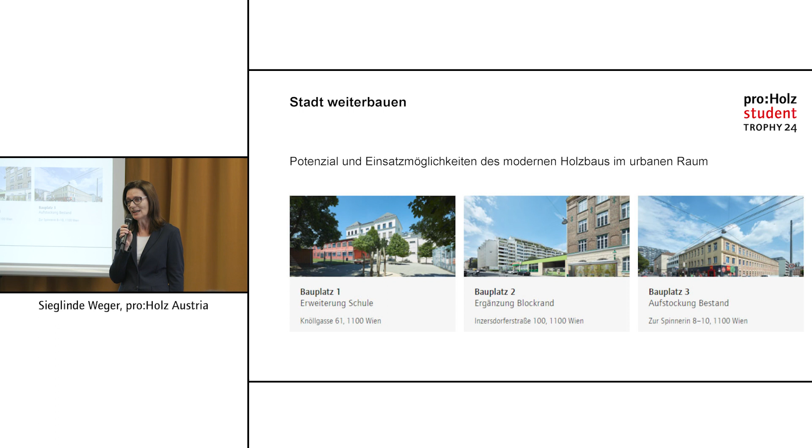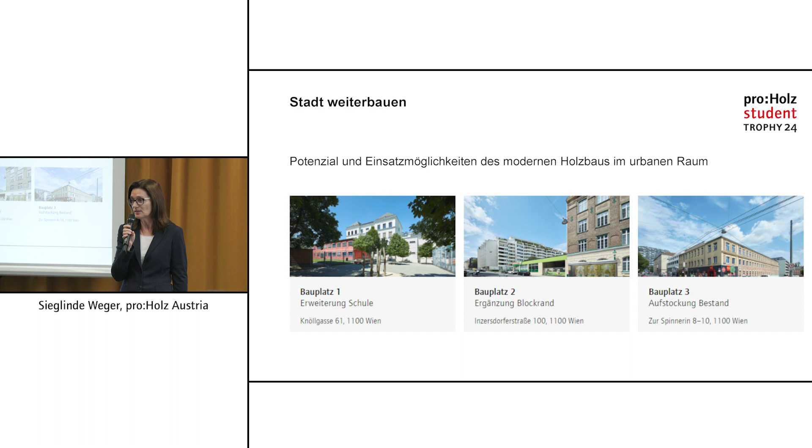As you probably already know, the construction tasks are all described in detail on our website, so you can already start working on them. I assume most of you have already started your design project as well.

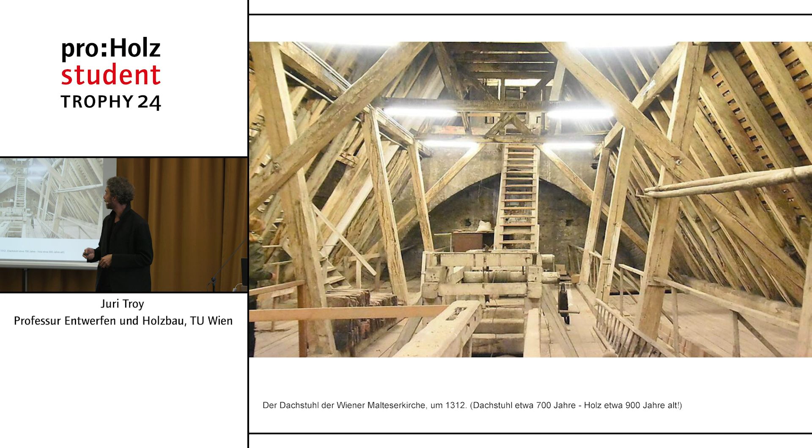I was lucky to grow up in a Rhine Valley house in Vorarlberg, which is now exactly 240 years old and still functions perfectly. Yes, you just have to design and build it accordingly, and then wood is actually capable of maintaining its function over a long period of time—except in cases where this is then prevented for whatever reason. And then it suddenly becomes very apparent that wood was used everywhere.

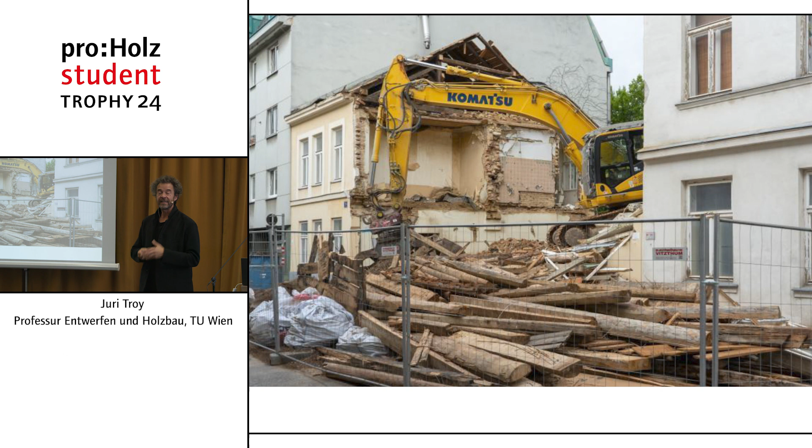We have to stop this madness. It really can't go on like this.

It can only be compared with the destruction that happened in Vienna during the two world wars. That was, if you look at it historically, an insane break, not only in our history, but, importantly, in our building culture, in the way we build and how we had been building up to that point, and in this strand as an evolutionary development of building culture that has been passed on from generation to generation.

On the one hand, this change and the necessity of rapid reconstruction have led to the emergence of completely new construction methods. But on the other hand, a great deal of building culture and knowledge has been lost. If you walk through the city now, you see a lot of these places where you realize that this has not been a continuous path of evolutionary development, but that there was a very strong break somewhere in between.

I strongly believe that every construction method also generates a certain inner logic and certain ethics for handling the material. And I also believe, and this is the wonderful aspect of working with wood as a material, that it demands such a clarity of structure, thereby also a clarity of thought and design, and forces you to think things from the ground up and develop this clarity out of the material.

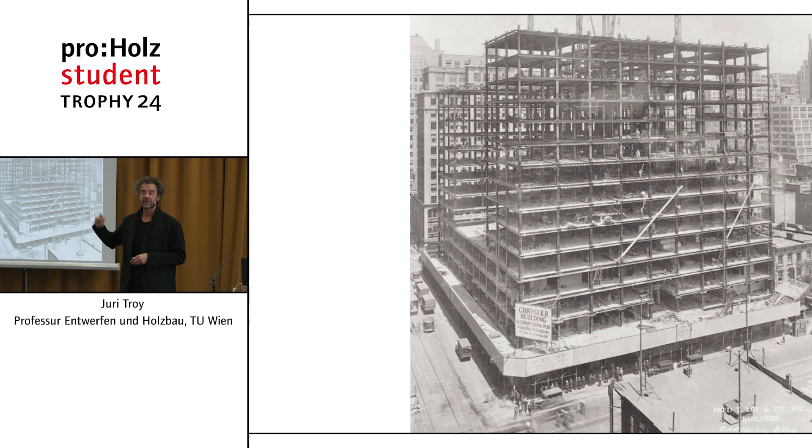I don't think it was supposed to be New York either, but what we see here is again a reflection of history, namely that due to these pressures, the strong influx and the strong population expansion and associated new technologies, the cities have also completely changed in a way that would not have been considered at all possible before. This pressure enabled a completely different way of building, a completely different architectural language, and a completely different development.

These changes were, on the one hand, the technologies and the materials, and on the other hand, quite small and seemingly unrelated inventions such as the lift, which led to the possibility that one could suddenly build upwards, leading to the creation of these new architectural structures.

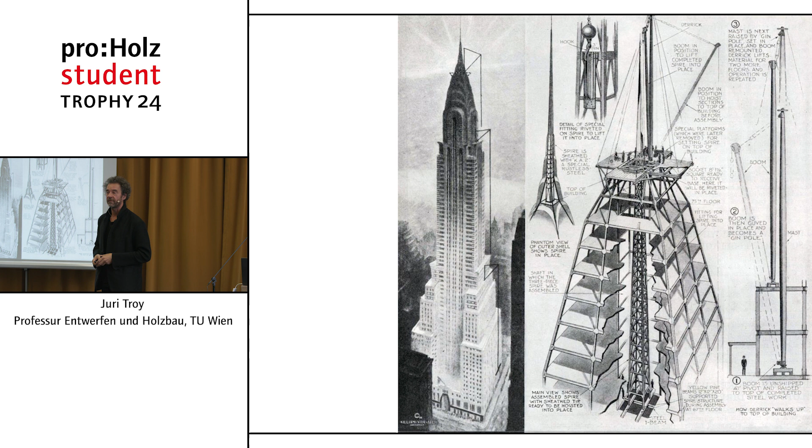Why I'm showing you this is because I really admire how people dealt with the challenges during that time. There are incredible drawings from the time and stories that explain how structures like the Chrysler Building were built. Right to the end, there was this fight for who would build what was then the world's highest building, and how they could prefabricate the top and push it out of the building from the inside at the end. Absolutely crazy. But there was no effort spared, and the technical possibilities were there, so that everything was just feasible. That was absolutely fascinating.

At the same time, however, there were evidently enough foolhardy people at the time who were also capable of completing it. You might think to yourself when you see it today, wow, that does not quite meet health and safety guidelines, etc. But it seemed possible at the time, and it looks like there was a certain pride in the eyes of the people who built these buildings back then.

Maybe we are not so far away from the situation we had back then. There are still reckless people today who do quite strange things. Perhaps the question is rather, how can we channel this energy and this recklessness in such a way that it can be used for more important things than a selfie at the top of a broadcast tower? That might be a question that I would put to you all.

Let's come back to the development of Vienna briefly. We already saw this very strong development 100 years ago. Then there was a decrease in the number of inhabitants in several stages until the fall of the Iron Curtain. That is when the low point was reached.

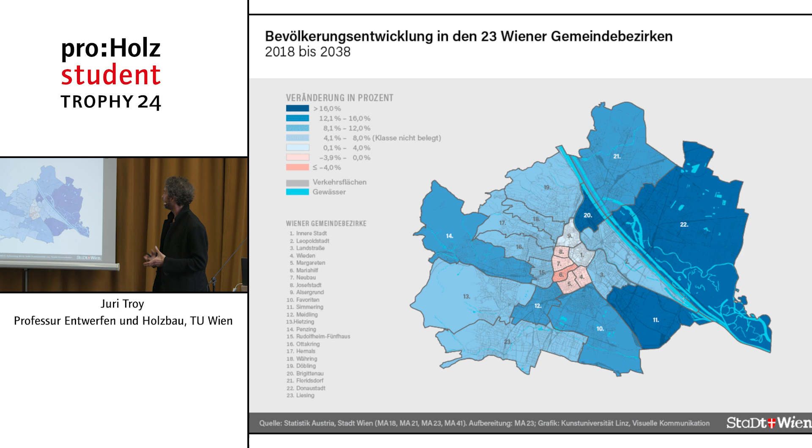As you can see, it is precisely in the districts with the largest surface areas that growth is strongest. Here in the center, where everything is already built up, there is naturally smaller growth. And if we look at it in more detail, you see our building site right here, also in a very dark blue zone. So a lot will happen there in the next few years.

I believe that this is actually only a symptom. It is not the actual problem, but a sign that in a certain way we have also forgotten to consider our principles at this point. We have thrown many of our basic principles overboard and have subjugated the earth in a way that may not be entirely good for it.

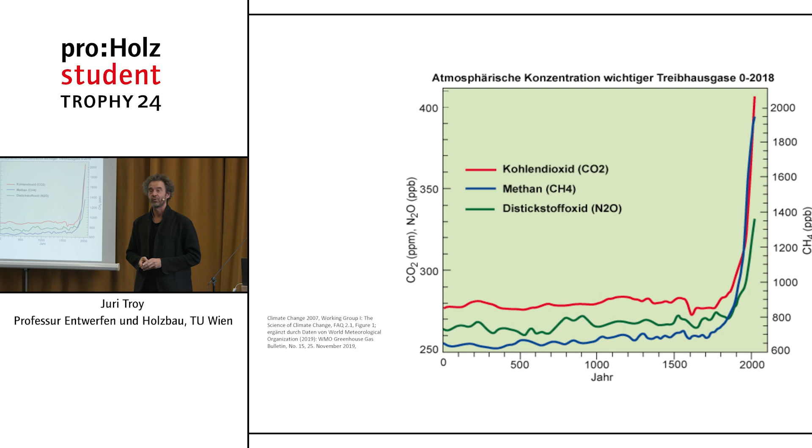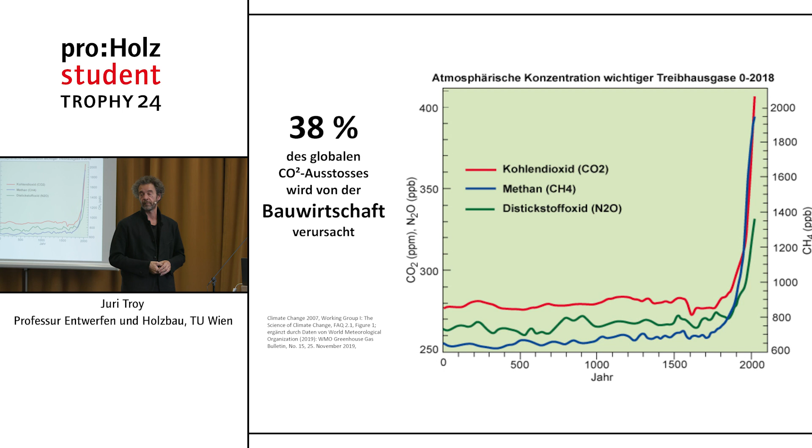And the result is that you know these figures. The construction industry alone is currently responsible for around 38% of CO2 emissions worldwide. It is similar with the grey energy and resources we need for that.

Talking about resources, this is also very obvious. I was born pretty much right at the time when we were just able to make do with what the earth gave us. Since then, things have been going steadily downhill, with one brief exception. We all know what that was about, when we were slowed down in what we were doing for a short time. But in the meantime, we are at a point where, globally speaking, we need 1.7 Earths, or use what the Earth gives 1.7 times.

And if we look at the individual countries, because we are of the opinion that we are always the good guys, we ride our bikes and we have green electricity. Unfortunately, we have to disappoint ourselves, because if you look at the global picture, we see that this year we were already at the end of our resources on April 6th. That is, in reality, the so-called developed world is still at only 1.7 Earths, because we have great many countries that are even less developed and are balancing us out. That is how it is.

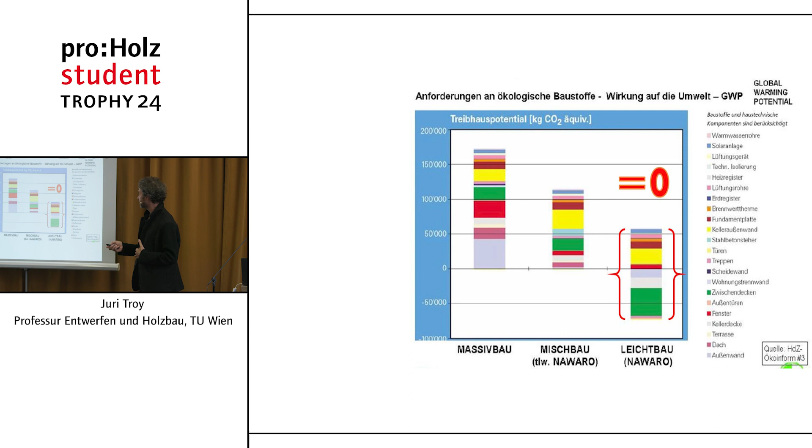This is also very much where your responsibility lies in the future. Namely, not to plan and then at some point say, yes, now we'll put a wooden facade on it because it's en vogue and looks good, giving yourself an ecological makeover. Rather, the basic decisions of your actions should be made at the very beginning. What design principle and what material - that's where the lion's share of the decision is made. Everything that comes after that on surfaces and so on is peanuts, insignificant compared to the first decisions made at the beginning.

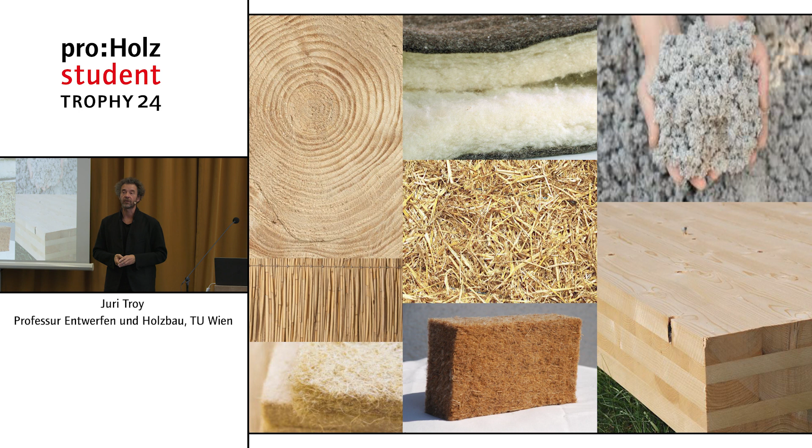And if we compare this with the last century and how it developed, even looking at present construction methods, I am convinced that we are at a point where we will be forced, both technologically and ideologically, to use these sustainable building materials. That means renewable raw materials that have been given to us, which we can use to create and construct without placing a lasting burden on the planet.

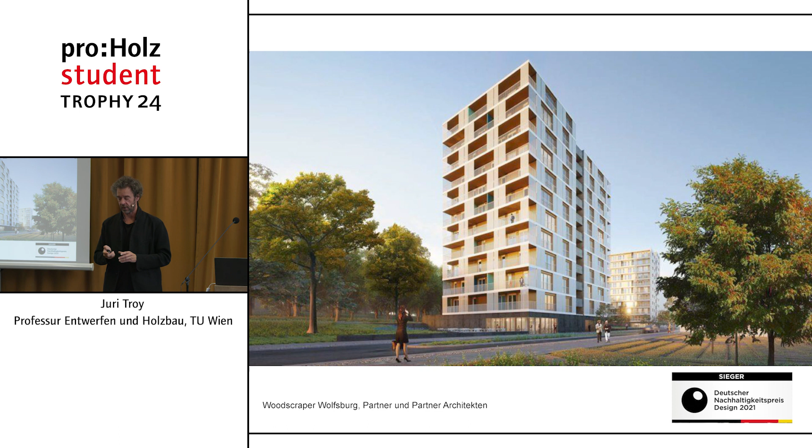There are now a number of these projects in the development stage or being built. I have chosen one example, this wooden high-rise called Woodscraper. You can sense that we are keen on these quirky lighthouse projects - I think that's nice, I think it's good. But I think it's also important as a symbol of perception. We will have to see to it that we broadly establish the perception that it is quite normal for these technologies to be used over a wide range of applications.

Earthquake safety will also become a more important issue in the future. Precise digital planning - I think this is another factor that will promote timber construction very strongly in the next century. That's also an invention of the last 20 years, and when it was invented, it almost totally replaced planning with a pen. I still learned that way in the 90s.

We used ink pens for drawing, and during my studies at the end of the 90s, there was this upheaval. As is always the case when new technologies come along, you first replace one thing right into the other. This is how these programs are still structured today - there are pens and layers, which are the former transparent papers that you put on top of each other.

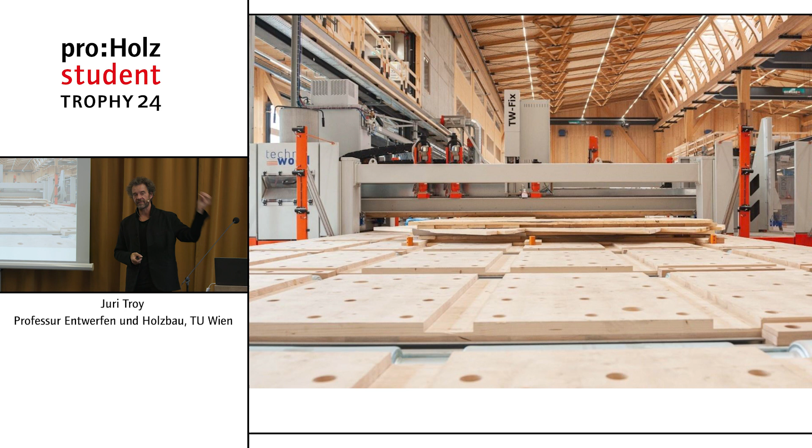Finally, a few pictures where you can also see wood, simply as a small inspiration for the wonderful rooms you can make with it. When you smell this wonderful building material on site, it is an absolute pleasure to walk through it. We will make sure that we go to construction sites a lot in our lessons to convey these qualities as well. I think that's also quite important - that's why it's important to understand the possibilities we have technically, so that you can plan properly and know what a machine is capable of creating and what the technologies behind it are.

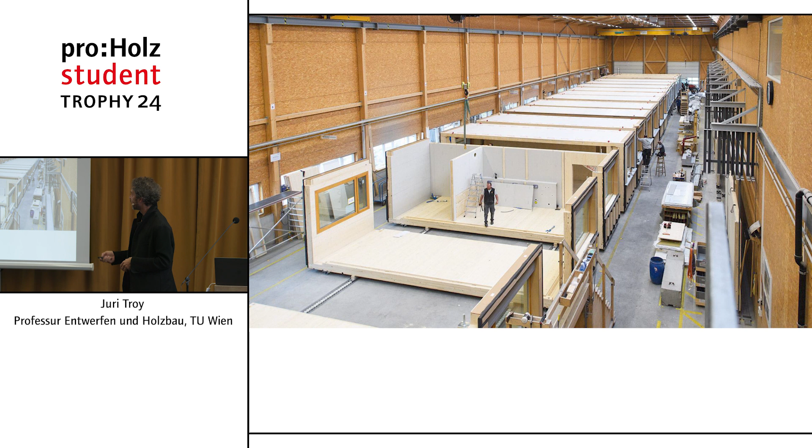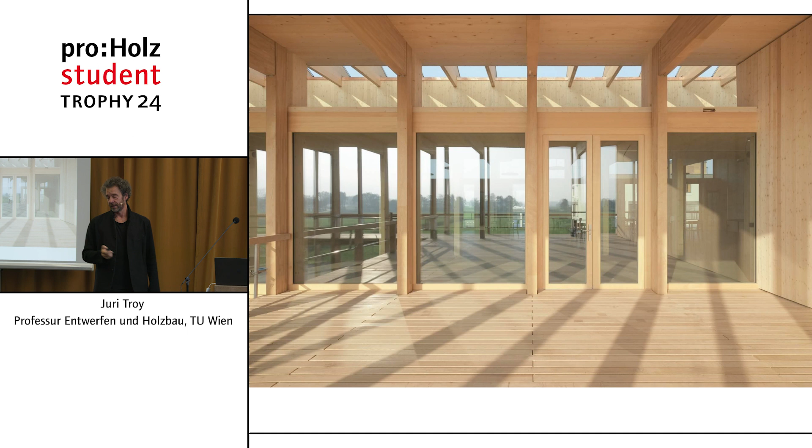The same applies to prefabrication. Building has changed completely in the last 20 years. 20 years ago, when I started out, such companies were still a novelty. In the meantime, there is quite a good network of such plants, which are not only capable of prefabricating individual elements, but also of prefabricating entire rooms. We could talk about this for a long time too. It is just important to me how direct the connection is with what is created there at the end. And I think we could talk about the qualities of these rooms for a very long time. But these pictures speak for themselves.

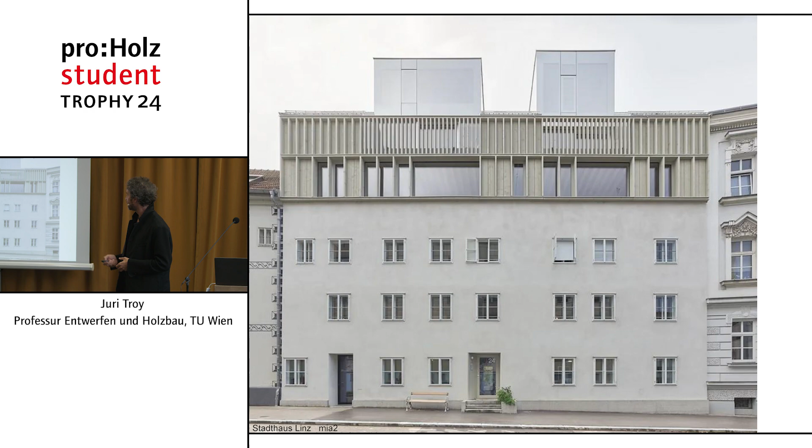There is also the matter of constructing educational buildings. I think there are an incredible number of inspirational buildings where you can see how the whole thing works, even examples in wood. And even in Vienna, there are already some finished examples that will help you look to the future with joy. Or look at this example here in Linz with this addition of a story, with a very modern answer to this issue of extending buildings.

Well, I'm finished with my presentation and wish all participants lots of fun with the projects. And now I'd like to hand you back to Katharina.

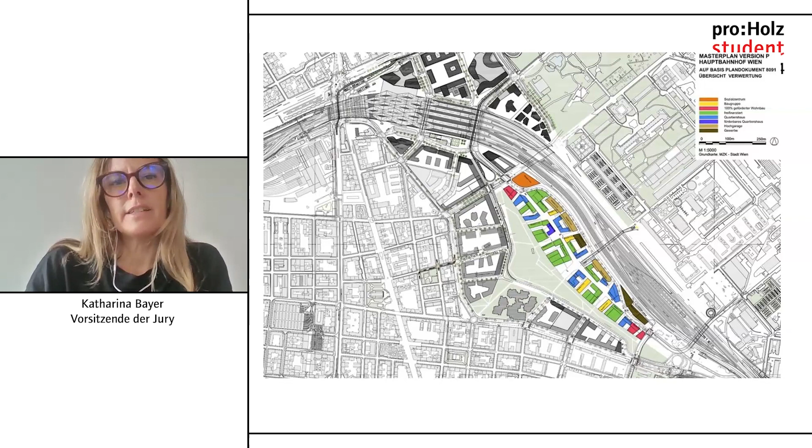Former railroad land, that is to say the classic inner city brownfield development, redensification in the city.

In recent years, as you can see here, around 5,500 apartments have been built around the park. I lived there, we also built there, so I have watched it very closely, and I can say that of these 5,500 apartments, only about 100 apartments were built in wood.

This means that although we have all the technical possibilities, although there is also an urgency to build urban with alternative building materials in the city, we are still a long way from implementing this quantitatively.

And again, the challenges have already been addressed. It is a lack of knowledge and it is also a lack of structures. In fact, when it comes to implementation, we often lack the companies that can also build these structures.

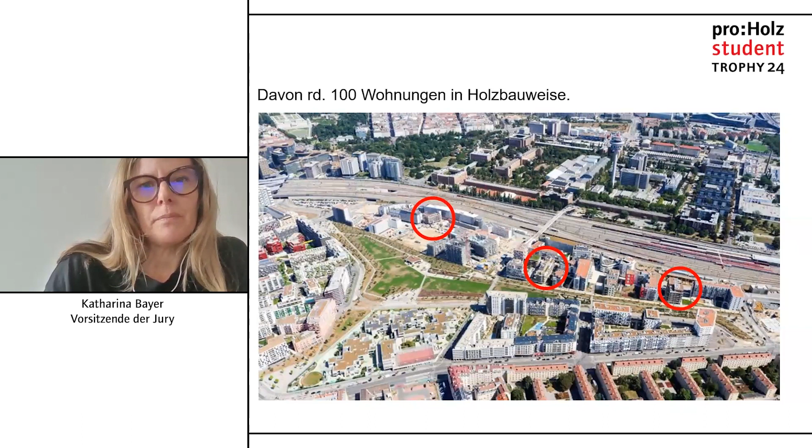In the future, we have to work on not only growing qualitatively, as it were, a great deal has already been done, but also on expanding quantitatively with wood construction and other bio-based and geo-based building materials in the city.

These are the houses we built there. One of these three wooden houses is the health quarter. This is a privately financed housing, more in the high-end segment.

There, it is often easier to implement such alternative building materials simply because the budgets are higher and the quality requirements are different.

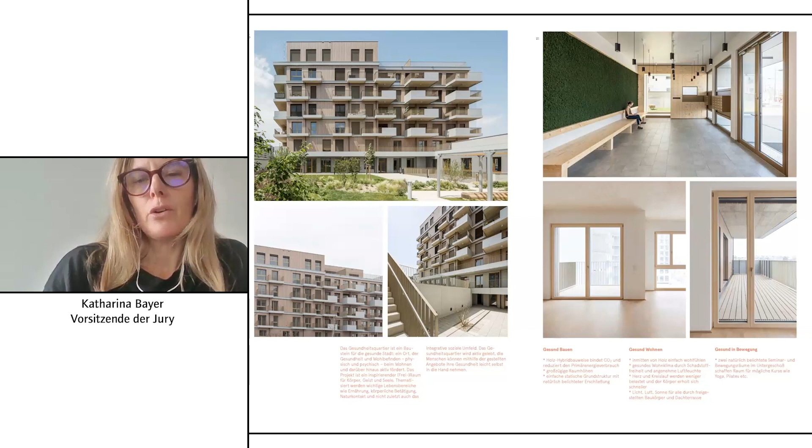We work very much in subsidized housing, for example, and there are simply limited costs there. This is why I am pleased that we have nevertheless managed to implement the Gleis 21 building group, subsidized residential building, a building group project in timber construction in the Sonnenwendviertel.

In the Sonnenwendviertel, the focus was always on mixed structure, that is to say a mixture of uses, which is also part of the task of the student trophy, and a special challenge in timber construction in terms of sound insulation, static properties, etc.

We have learned a lot in this project, which should contain a lot of flexibility for this participation of the users, and have developed some things here to make this possible.

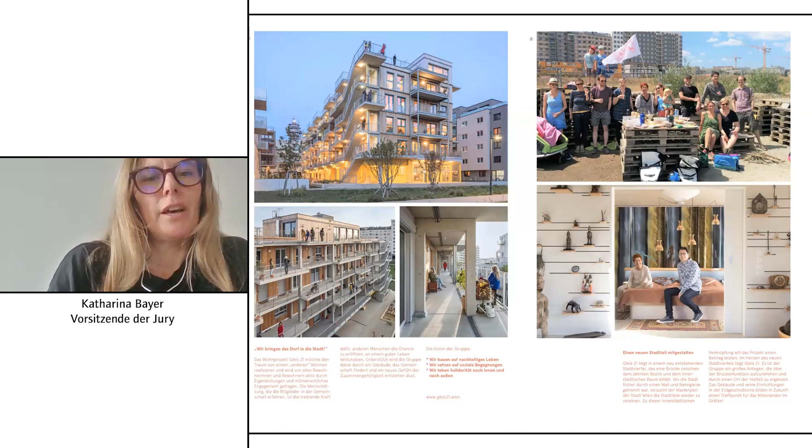Here are a few more impressions of the project. I don't want to go into it in too much detail. If you are in Vienna, you might as well check this out along with the building sites.

These three buildings here, the third building, which was constructed in wood, is also a building group project by architect Reinberg, Bikes and Rails. I believe all three buildings are actually wood hybrid buildings. I'm not sure about Bikes and Rails.

That means that not all components are purely wooden structures. This often has to do with sound insulation and other fire protection requirements.

Which is why this is not yet possible in its pure form or only with very increased effort, but it is increasingly moving in the direction of pure timber construction solutions in dense building.

Now I would like to move on to the task of the project. As I said, I come from a practical background. It is very important to me to bring this practical perspective into the jury and to ensure that we not only think in terms of wood.

But also in terms of demand. That is, even in timber construction, it is about finding solutions that support the use.

I believe that these are the main challenges that the tasks pose here.

Wooden City is the name of this year's competition, and I think it was called that last year as well. This is an open competition for students. I assume that most have already read the specifications, so I would just like to give you a brief outline and summary. I think there's also an opportunity for questions afterwards. It is an international competition, as has also been said.

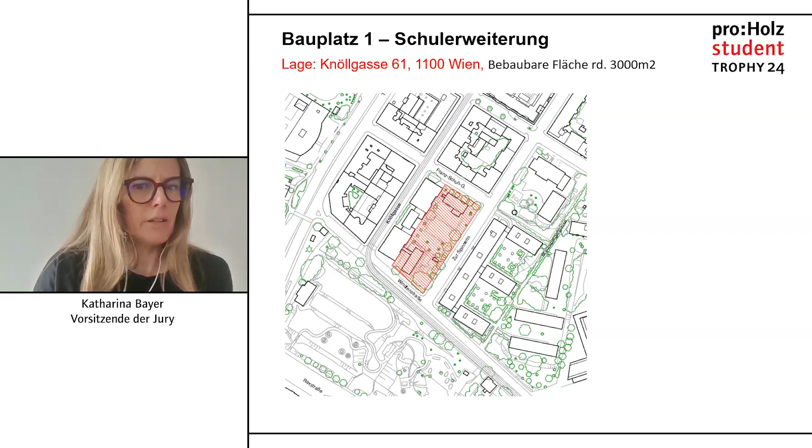Site 1 addresses the very issue of school expansion. It is located on Knöllgasse. The red shaded area is the one that can be built on. The front is the existing building, and the area that can be built on is about 3,000 square meters. There is a very precise specification here, of course. As in school building construction, there is a spatial program that must be implemented. That is why this location also has the most specifications in terms of space and functional program.

It is an existing primary school with 430 children in an openly managed school. Openly managed means — please correct me if I'm wrong — that there is full day teaching here, meaning free time and teaching are interleaved. That means the children really spend the whole day in school. This is also important for the task: this is not just a building for learning, but also a building for spending time there, for playing, etc.

Now, an extension of the location is to be planned to include a secondary school. The existing primary school is for 6 to 10-year-old children, and after primary school, children have the possibility of attending a general secondary school or a grammar school. So we are talking about a school for children aged 10 to 14, and for these pupils an extension is planned here.

It is, of course, also about contemporary pedagogical concepts. This is state-of-the-art in school construction. Our existing schools are very often still functionally and rationally structured, offering little opportunity to spend time, to meet, to learn together. They represent front-of-class teaching and were more disciplinary institutions than institutions that promote personal development. Contemporary pedagogical concepts mean completely different spatial requirements and different opportunities for encounters.

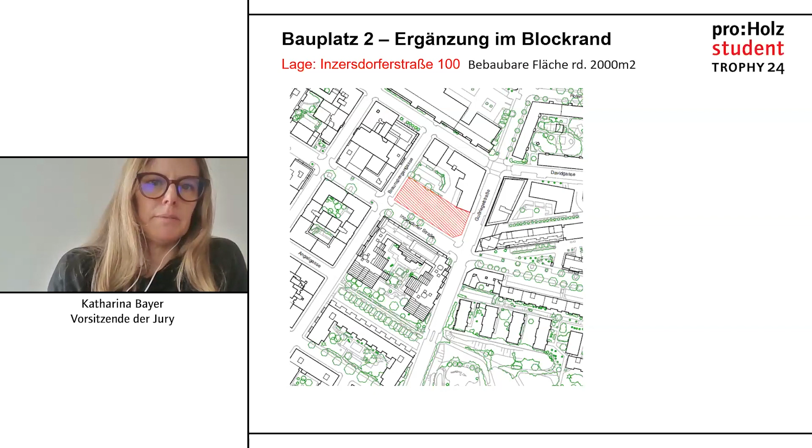The address is Inzersdorfer Straße 100, and here we have a buildable area of about 2,000 square meters. In case land is available in the city, it is very often dedicated to housing. I say housing is the essence of the city, the largest amount that makes up built-up space and therefore also

shapes our cities and where there is the greatest need in growing cities. That's why I'm glad that the issue of housing is also addressed in the task definition, as is the issue of affordable housing. This means it's not only about providing high-quality housing, but also making it affordable and accessible to everyone from an economic point of view.

This is a building volume of around 6,000 square meters of usable space, where at least 4 stories should be added. You can check what can be integrated here. It is certainly not a bad idea to integrate even more stories, after all the adjacent structures are structures from the Wilhelminian time.

This means the surrounding buildings often have very high floor heights. In new buildings, it is often possible to add one more story with reduced floor heights. So it also has to be weighed up at the same time how high the building can be, how high it should be, how much living space is appropriate and can be integrated well.

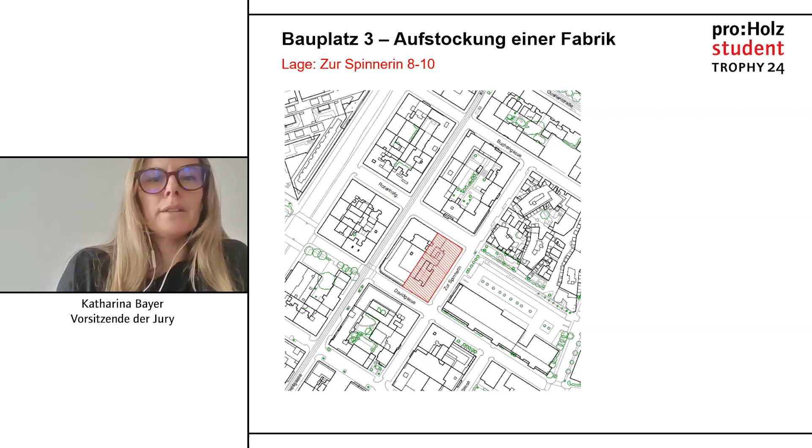Let's come to the third task, the addition of stories, also a very important and worthwhile task, I think, which reflects the theme of redensification in the city very well. Often existing buildings are not so high. There is a high densification potential upwards in the city, and also to redesign this roof as the fifth facade and to offer open spaces here. These are all issues that are reflected in the theme of adding stories.

This task is about adding stories to a former tobacco sleeve factory, which is also very symbolic of the 10th district, perhaps, since this is a factory building. The task is to add at least 2 stories and 2,000 square meters of usable space here. Here too it is important to weigh up how much is tolerable and how much is possible. Of course, we want to use building sites as much as possible, but we don't want to restrict quality.

The functions in the existing building are to be retained. There's a local grocery store and a further education facility. The addition of stories is about a flexible mixed type of a cluster and studio living. I think there's also a definition what cluster and studio living means. It is living and working in a communal structure.

Of course, it is important to integrate private open spaces. This also applies to the previous building task. And because there is no ground area available that we can use, it is very important to think about the roof as an open space, as a potential use, and to consider how this roof area can be used for communal uses and as an open space.